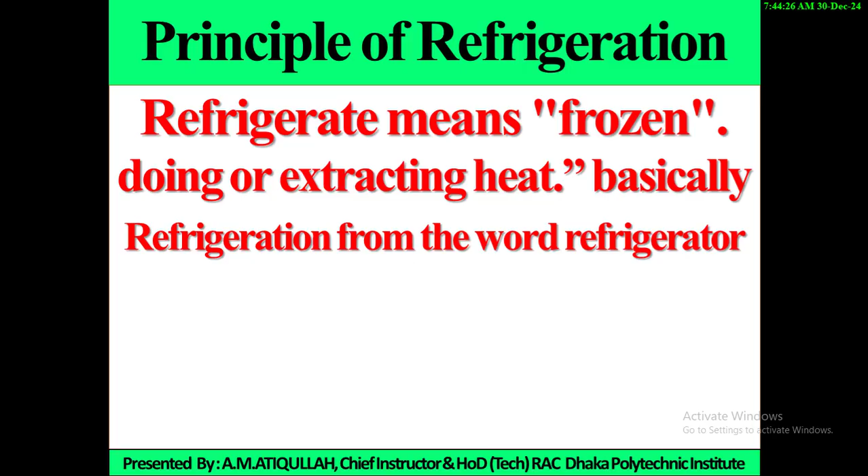Principle of refrigeration. Refrigerate means frozen, doing, or extracting heat. Basically, refrigeration comes from the word refrigerator. Refrigeration means freezing, cooling, or refrigeration.

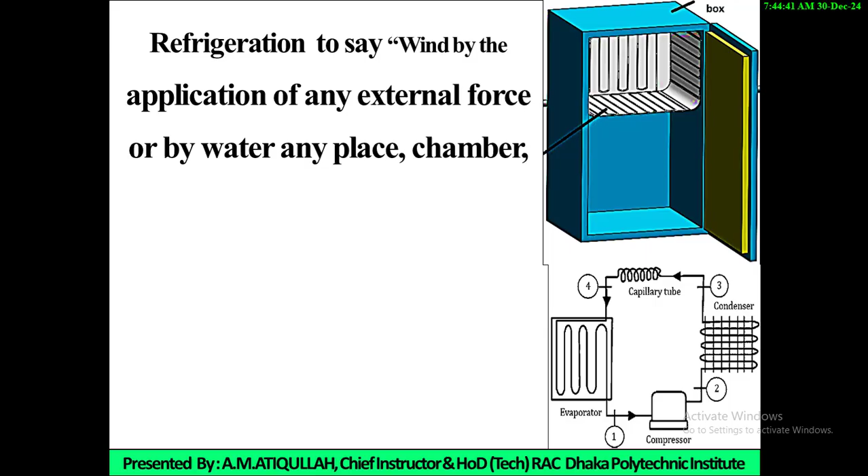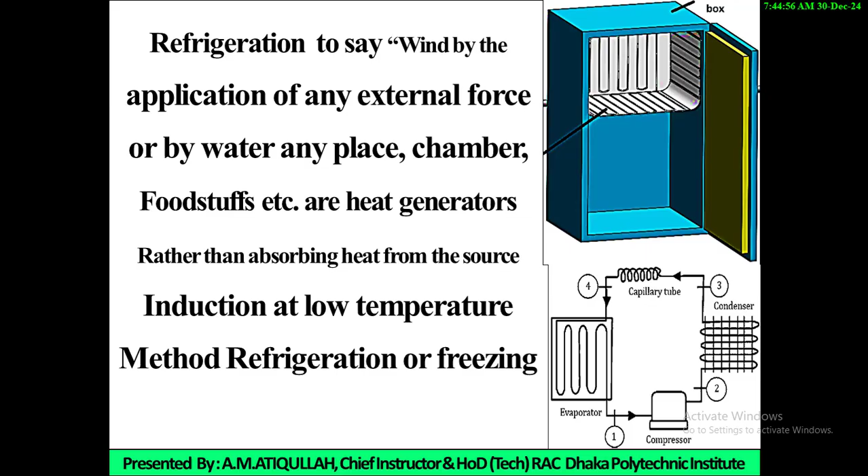Refrigeration means that by application of any external force, or by water, any place, chamber, or foodstuff are made to absorb heat from the source rather than generating heat, thus inducing a low temperature. This method is called refrigeration or freezing.

Refrigeration methods are mainly of two types: direct cooling methods and indirect cooling methods. These are also classified based on heat conduction as convection refrigeration methods and conduction refrigeration methods.

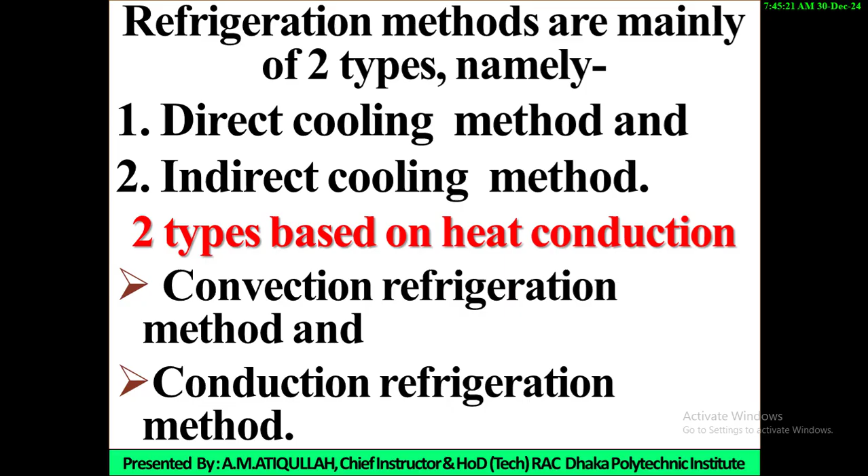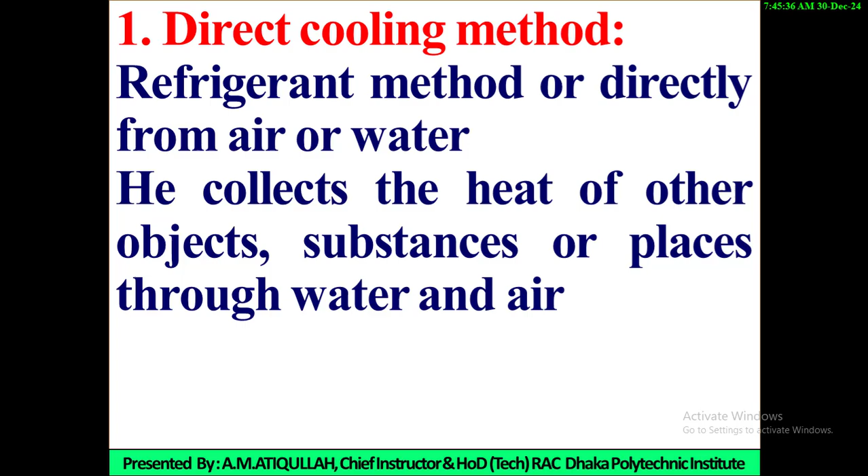Direct cooling methods: the refrigerant directly collects heat from air or water, or from other objects, substances, or places, through water and air. This is called direct refrigeration systems. This is vapor compression refrigeration systems.

It is meant for equipment such as compressor, condenser, evaporator, and expansion device.

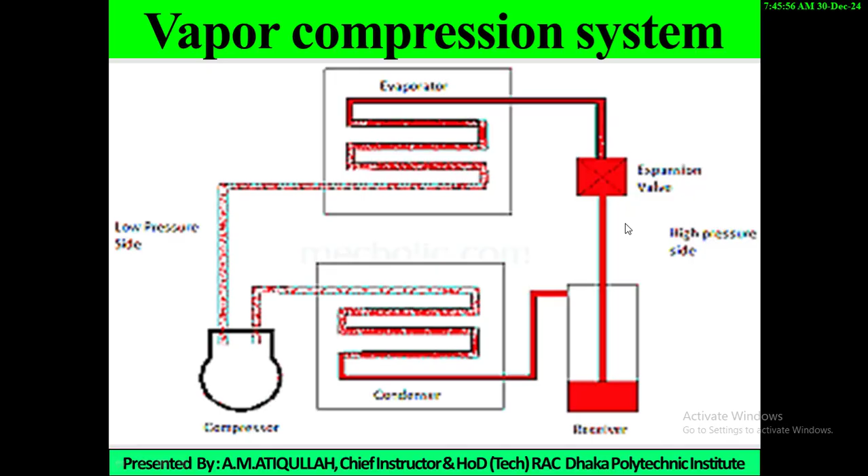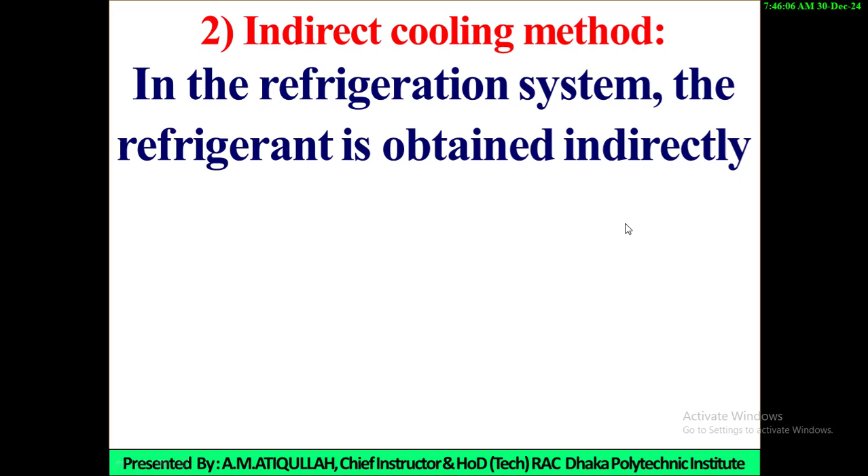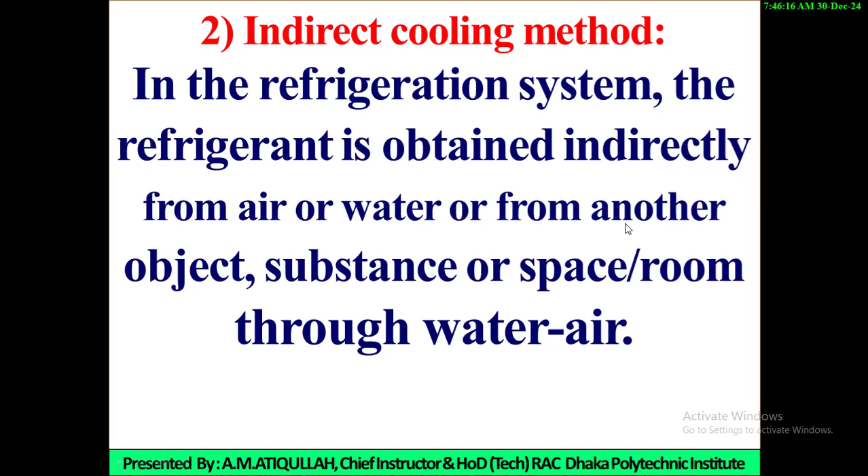Indirect cooling methods: in this refrigeration system, the refrigerant obtains heat indirectly from air or water, or from another object, substance, space, or room, through water and air. This is called refrigerant indirectly.

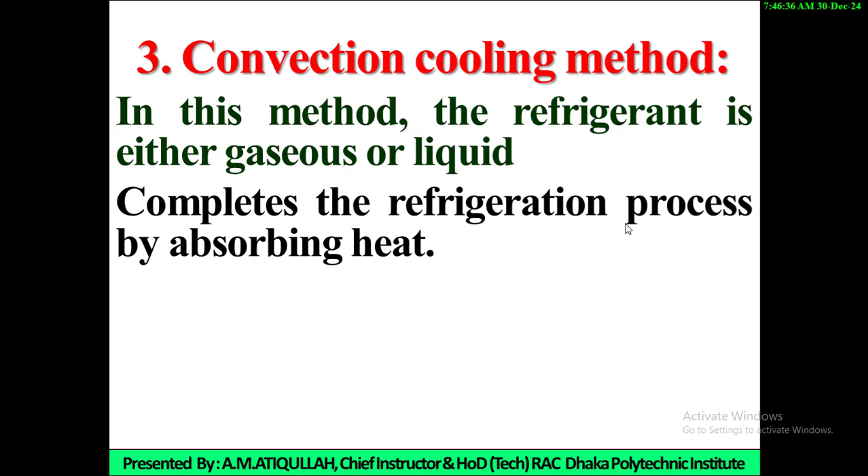Convection cooling methods: in this method, the refrigerant, either gaseous or liquid, completes the refrigeration process by absorbing heat. For example, the evaporator in a refrigerator or fridge absorbs heat from the chamber air.

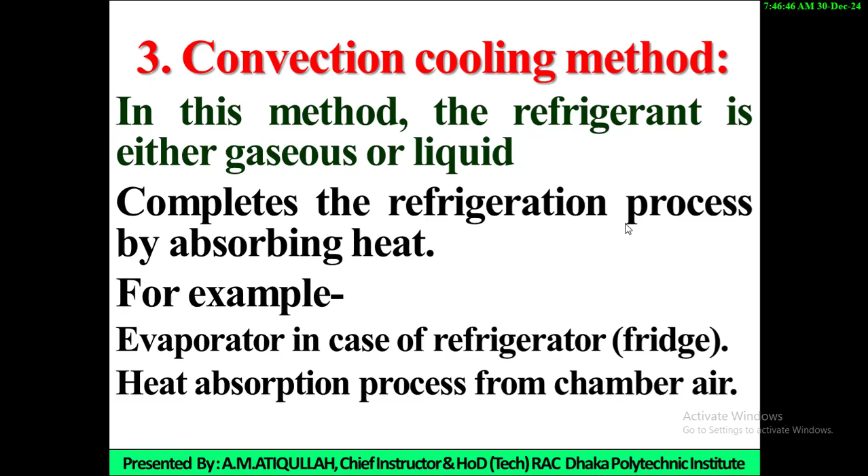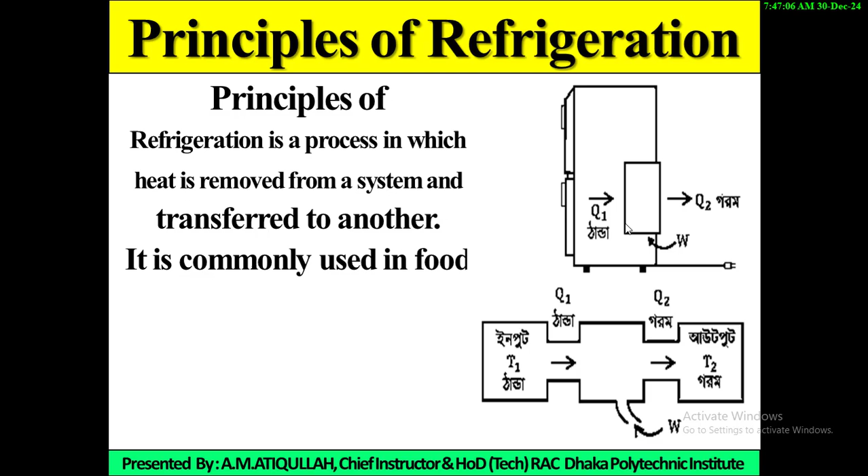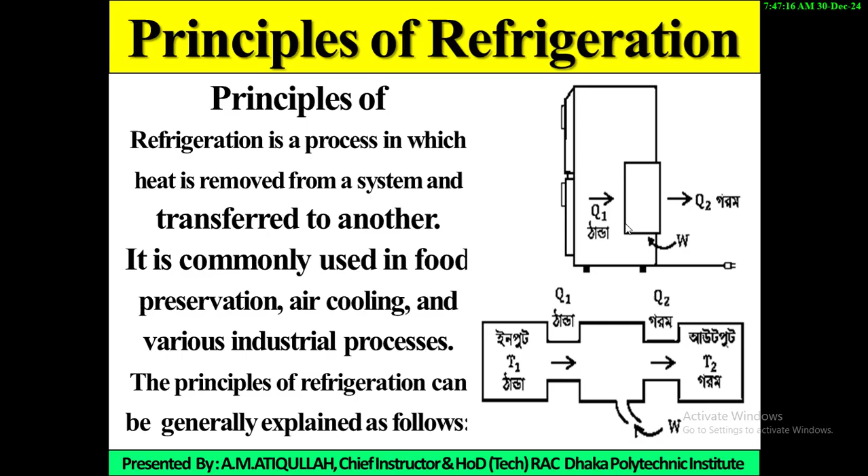Principle of refrigeration: it is a process in which heat is removed from a system and transferred to another. It is commonly used in food preservation, air cooling, and various industrial processes. The principle of refrigeration can be generally explained as follows.

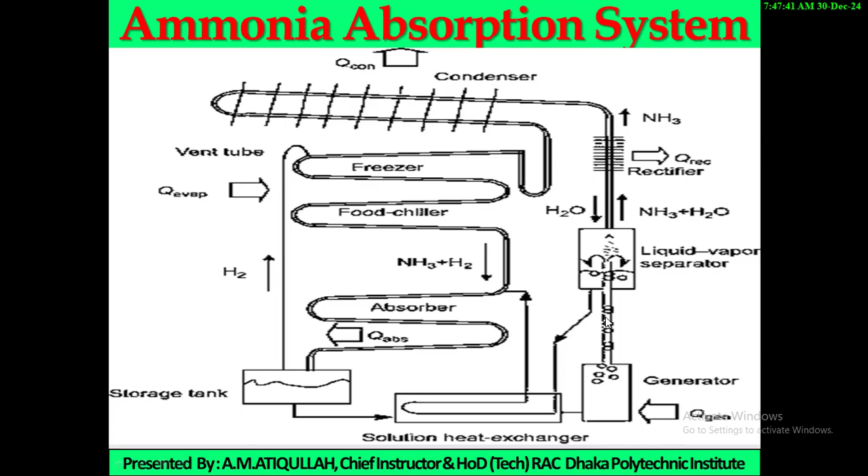This is absorption refrigeration systems. Its main parts or components are: generator, separator, condenser, evaporator, hydrogen chamber, and absorber. This system is not used with a compressor.

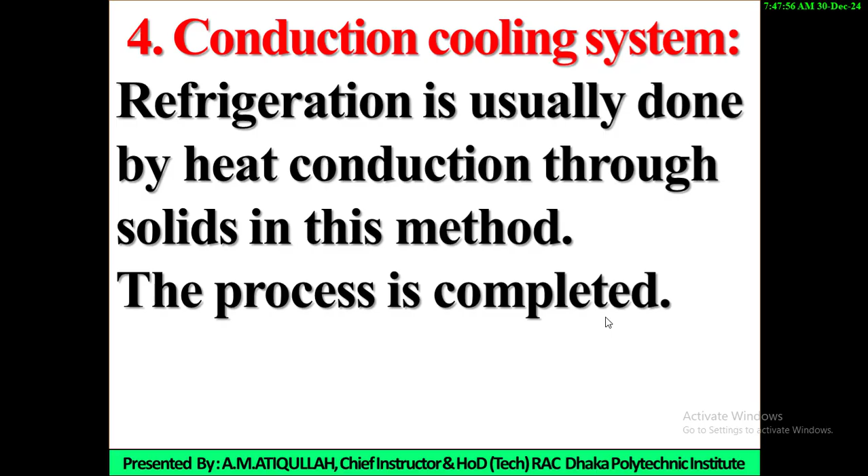Conduction cooling systems: refrigeration is usually done by heat conduction through solid materials in this method. For example, the thermoelectric refrigeration process.

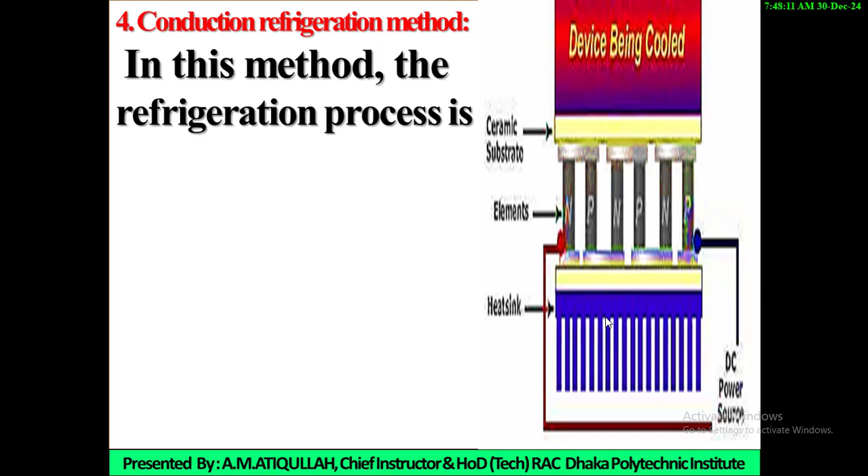This is thermoelectric refrigeration process, a conduction refrigeration method. In this method, the refrigeration process is usually completed by conduction of heat through solid materials.

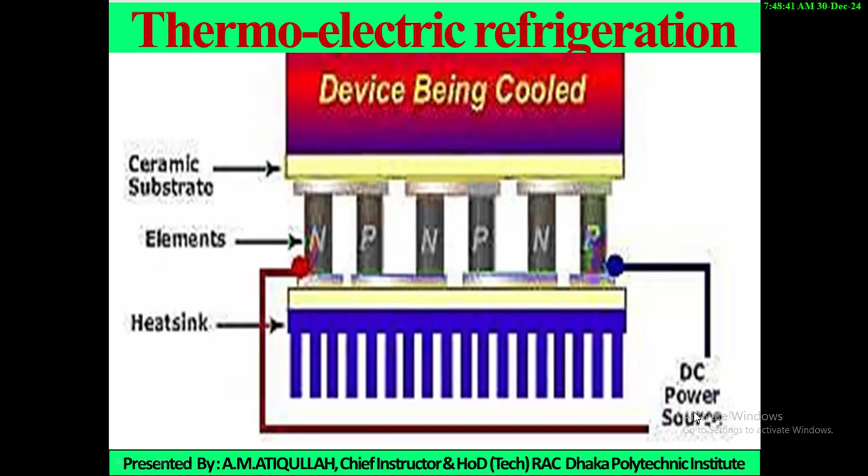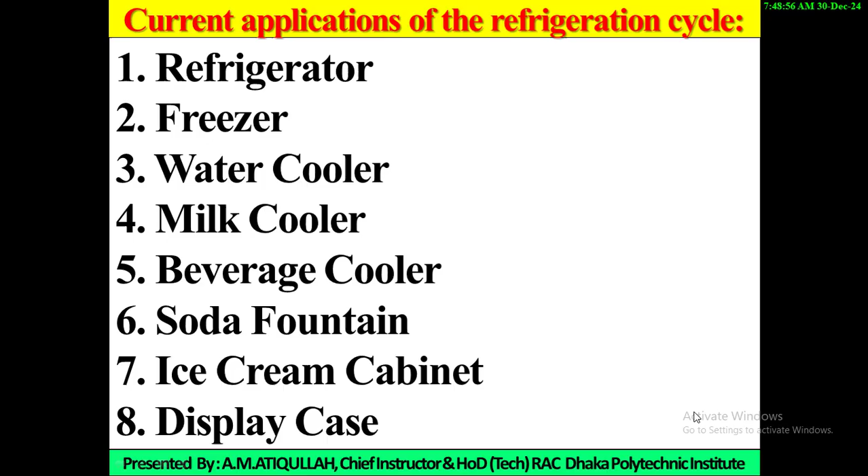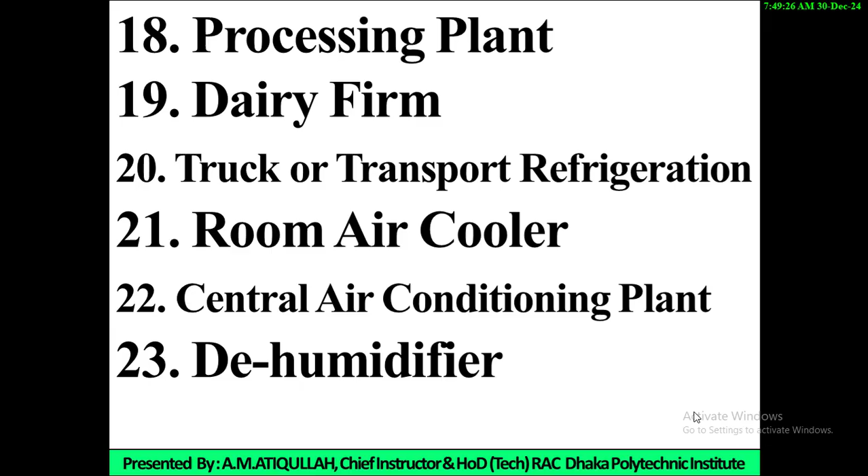Current application of refrigeration cycle: refrigerator, freezer, water cooler, milk cooler, beverage cooler, soda fountain, ice cream cabinet, display case, walk-in cooler, reach-in cooler, ice maker, cone ice machine, candy and ice cream factories, ice plant, cold storage, fish preserver, processing plant, dairy farm, truck or transport refrigeration, room air cooler, central air conditioning plant, dehumidifier, incubator, etc.

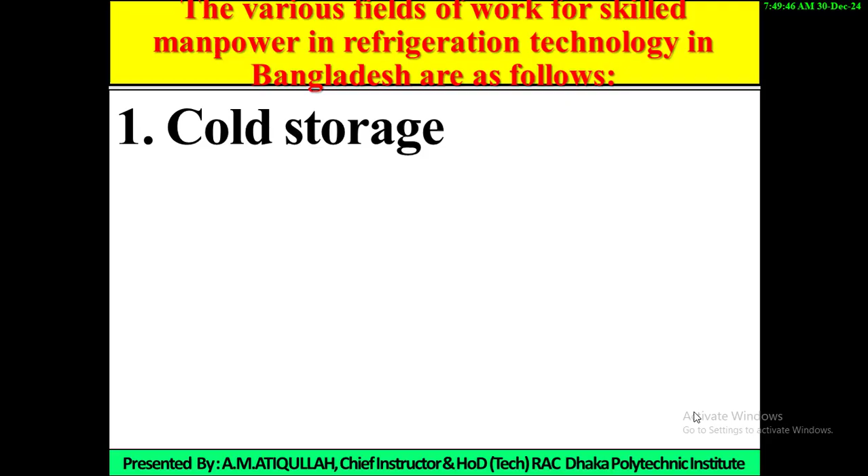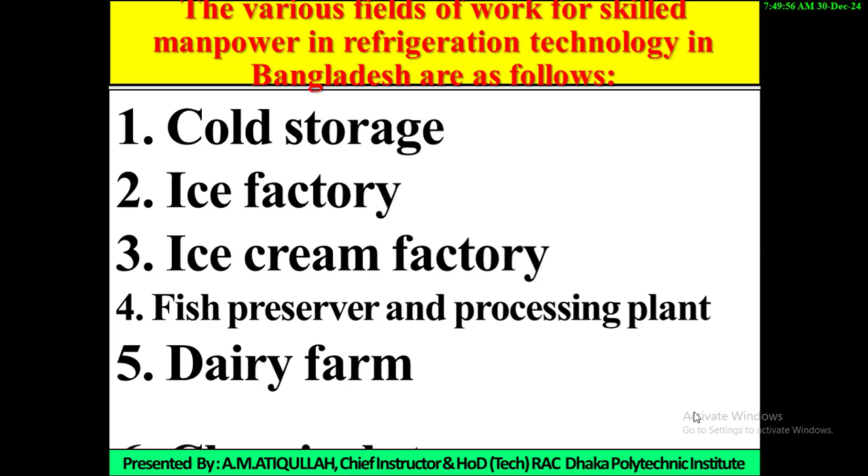The various fields of work for skilled manpower in refrigeration technology in Bangladesh are as follows: cold storage, ice factory, ice cream factory, fish preserver and fish processing plant, dairy farm, chemical storage, cigarette, chemical, rubber, soap, powder and cosmetic factories, jute and yarn mills, storage of electronics goods and office equipment, air conditions, auditoriums, cinema halls, multi-storey and commercial buildings, hospitals, banks, radio and TV centers, parliament building, etc.